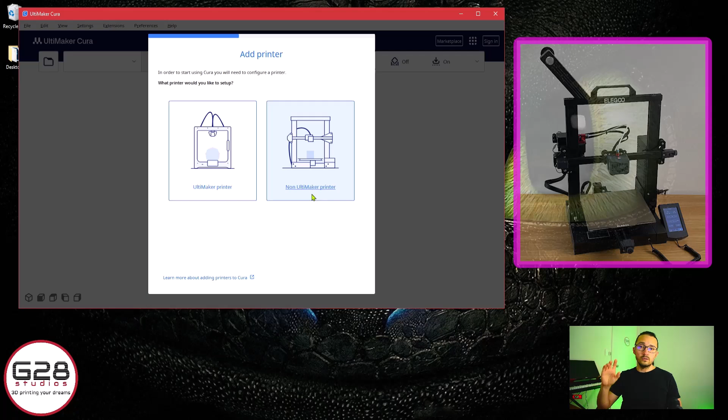In this case, you will see settings only for the Neptune, for Bowden tube printers, okay? So I'm going to select non-Ultimaker printers and hit add a non-network printer. I'm just going to search for Elegoo and Elegoo Neptune 3. Elegoo has Neptune 3, 3 Max, 3 Plus, and 3 Pro. I've got the standard one, which is 235 millimeters width, plus 280 height max. That's the maximum.

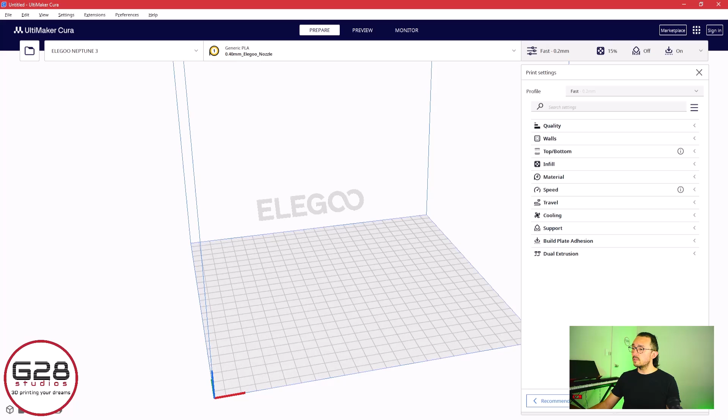What I like to do here, the first thing is change the printer settings options to the advanced options. I don't really remember how to do this because the last time I did was... there you go. So you just click custom and then you have everything. And then here you can click expert, or you can click all. I'm just going to click all.

It doesn't mean you need to use and change all of this stuff. I'll show you just the real pieces you need to change. Quick note, there's going to be a lot of probably tests that will fail because I don't know why that happens, but you have to tweak something else for the tests to work, like Z-hop, which I'll show you in a minute. So you have everything there, you have all the settings there.

Quick note, I'm going to use a completely brand new, unboxed filament. This one is from the brand Techcore. If you Google it, you probably won't find it, but this one is from Inkstation. I'm in Australia, and I have to give a really good shout out to Inkstation because their filaments are great, and their support is great as well.

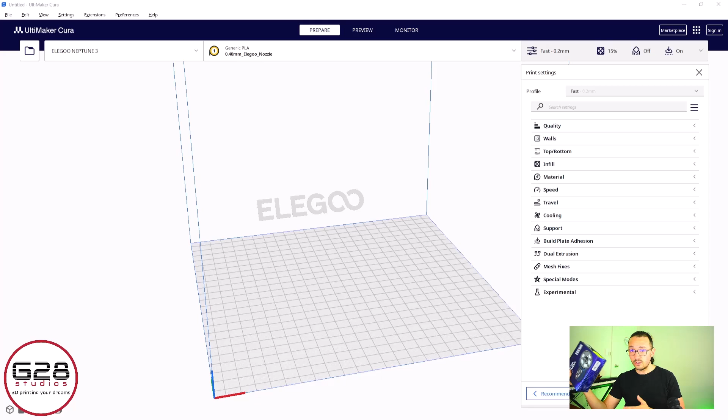I've bought hundreds of them, and I've had a few issues with filaments. When I have issues, I contact them and they either ask me to send the filament back to them with no cost at all, and they give me credit to buy another filament in exchange.

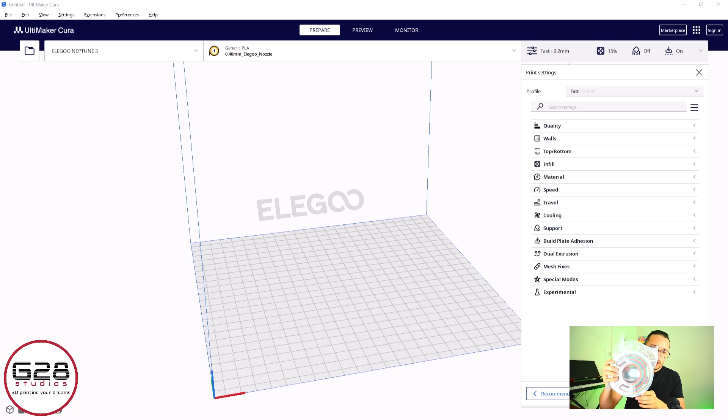So this one is a PLA Rainbow filament. It's a multicolor filament, and it's not silk, so it's not a shiny finish. It's totally enclosed in the bag because I'm going to test this one from scratch for you.

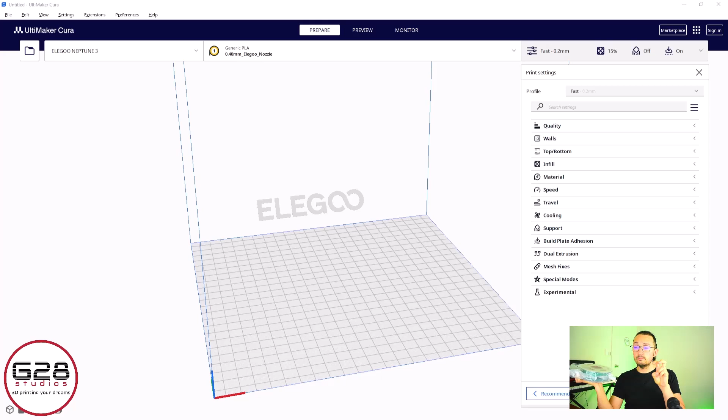If you have a filament that's already been sitting somewhere on a bench, we're going to have some issues with these settings, because this type of material absorbs water, so it gets humid, and that moisture just screws up the filament. So just so you know, we're starting from scratch with a really good, probably dry filament. We'll see - I'm pretty sure it's dry.

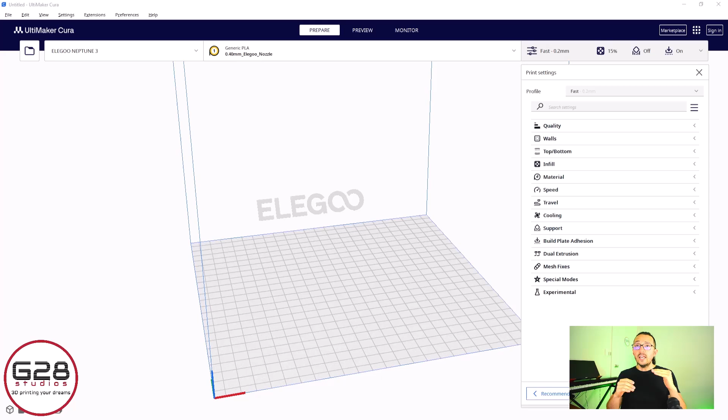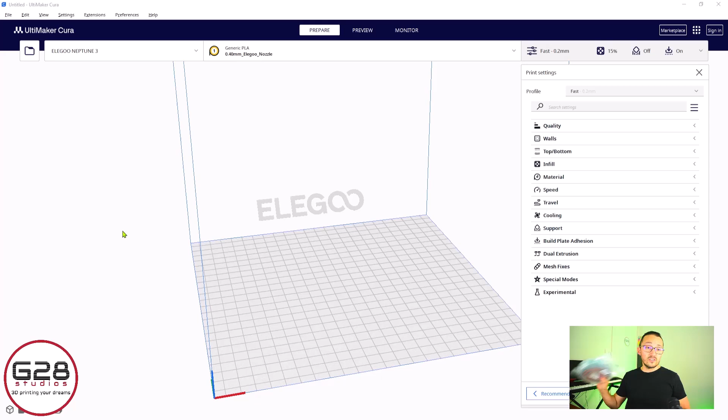So the first thing we're going to talk about is the temperature tower. What the temperature tower is going to do is allow you to find the best temperature for your filament - where it melts, at what temperature it melts, and how fast it dries. I'll show you what I'm talking about on screen. So let's talk about how to create the temperature tower that will allow us to find the best temperature for this filament, specifically for this roll, okay?

In general, I use 200 degrees. Sometimes I go down to 195, and sometimes I go over 200, up to 210. When do I go low, when do I go high? I go higher when it's winter, and I go lower when it's summer.

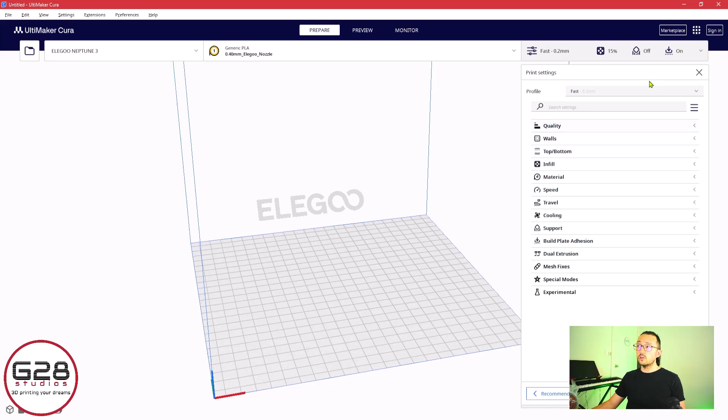Go to the top right corner, click Marketplace, and then you can type calibration - it's going to show that option at the top. Before it was called something like calibration shapes or something like that, but now they have this auto tower generator, so you just install it. Accept - it says install and quit Ultimaker Cura, so you quit it and then reopen it. It has changed - last time I used it was 1.5 years ago.

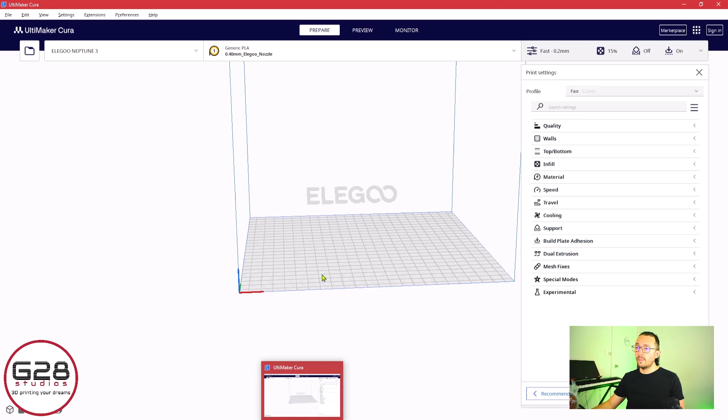Okay, here you go to Extensions and Auto Towers, but under post-processing you'll see something else. And the first thing we're going to work with is the temp tower, so you just click it and it's showing you. Now, I need to tell you, I'm going a little bit blind here because the settings have all changed a lot. I may understand what's going to happen next, but it's changed a little bit, so I'm not going to pretend I know everything. It's better if you see me being natural instead of watching a video that's cut off every 2 seconds, okay? So just follow me and I'll explain.

So the PLA and PLA Plus - they're the same PLA filament, but the PLA Plus has something that makes it better. Both print the same. This one is a normal PLA, and I'm going to show you the difference between the temperature tower for PLA and PLA Plus. So let's add the PLA one.

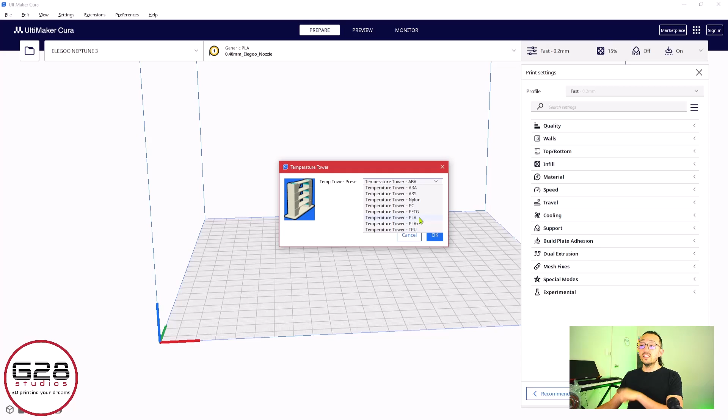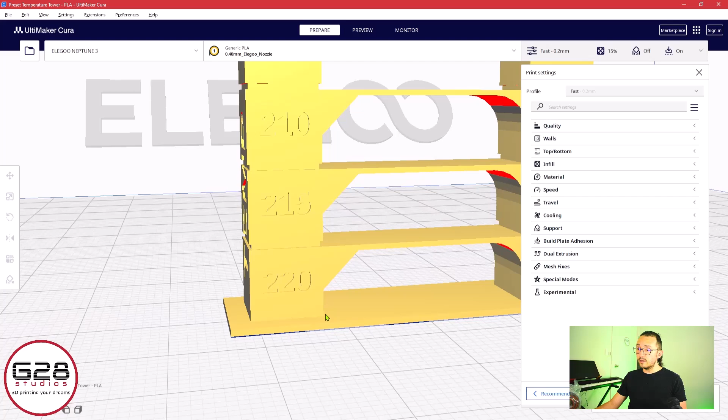Do you see this number at the bottom? It says 220. That means the printer will print this - let's call it a bridge - at 220 degrees, only if we tell it to, and I'll show you how to do it. So it starts at 220, finishes the bridge, and then the next bridge on top of it will print at 215. If you don't know how to use Cura, to pan left to right, up and down, you hold the scroll button.

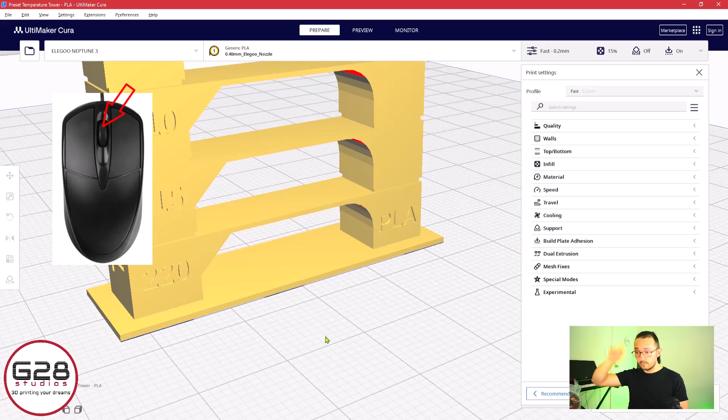So you have the scroll wheel: click it, then click, hold and drag to move everywhere. If you want to zoom in or out, just scroll up or down. If you want to move around, like turn the camera, you right click, hold and move. And left click is normal select.

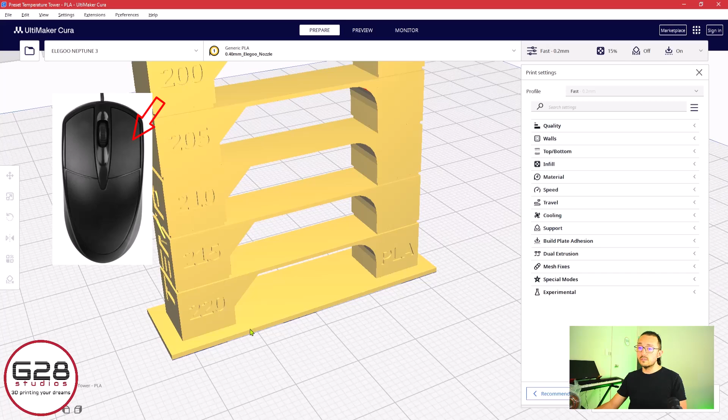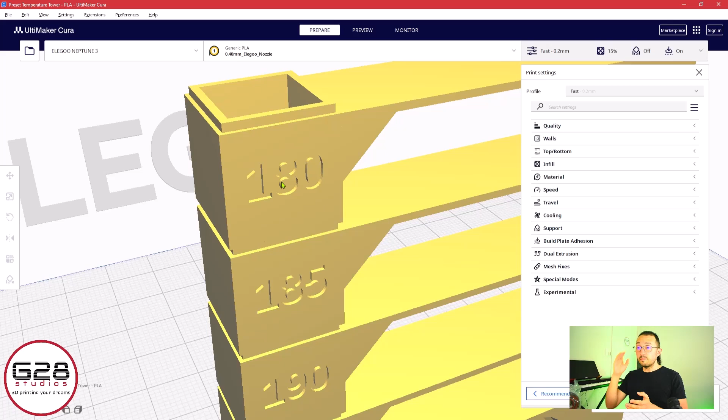Anyways, first bridge 220, second bridge 215, we can go down to 180. Honestly, if I forget the printer is printing, I just leave it to finish. But if I'm looking at the printer and waiting for it to finish, I would stop this at 190, because lower than 190 the filament in the hot end isn't hot enough.

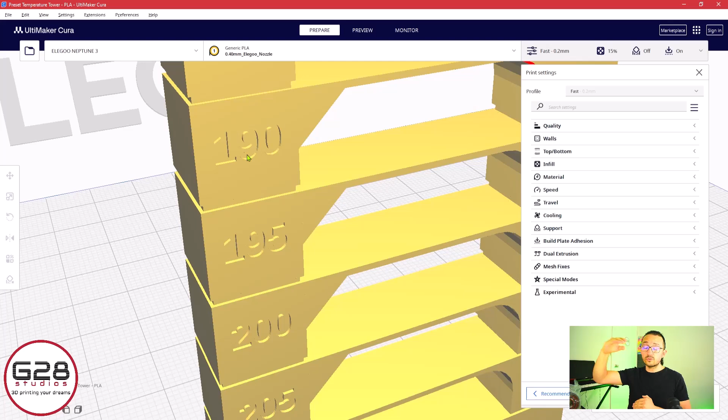So at 190 you will see the range difference between 190 and 220. Now this is the tower for the PLA.

Let's add the PLA plus. So you go to extensions, auto towers, temp tower, and then select PLA plus.

PLA plus, since it behaves differently, goes from 230 up to 200. So what it's telling you is that those are the good temperatures for that type of filament. Same thing, I've used both PLA and PLA plus at 200, between 195 and 205. It really depends on how hot or cold the weather is where you are at the moment. So you'll see that if you print at 200, that's a really sweet spot to be printing.

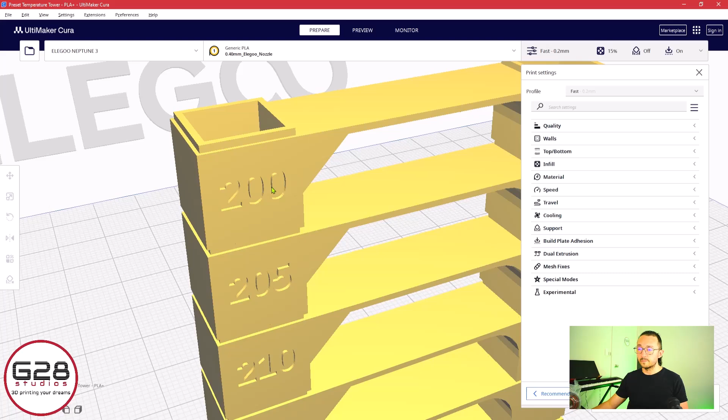I'll change this back to temp tower PLA because that's the one I'm going to use. Oh, this is annoying.

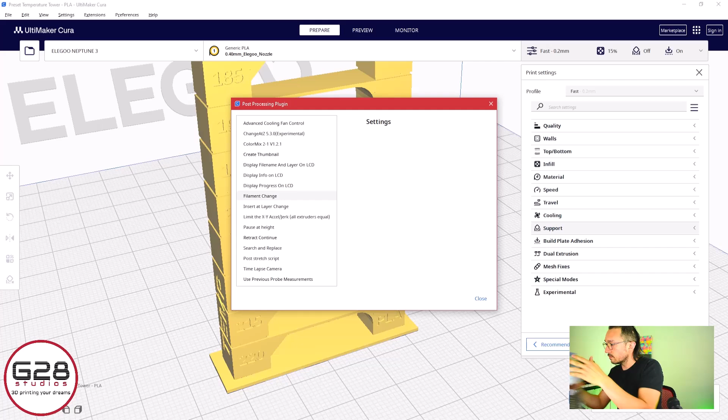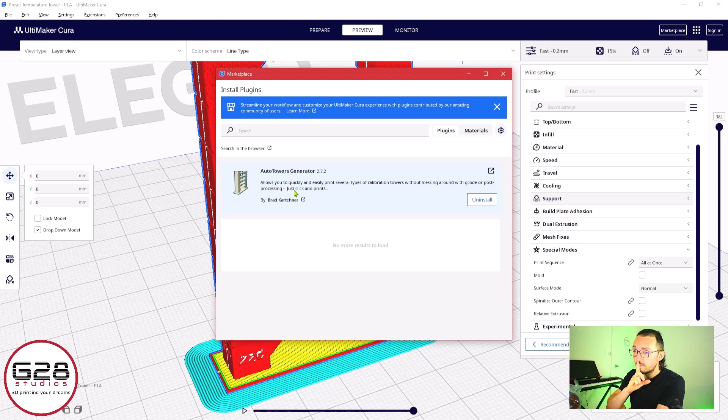So after reading a little more about this, I found this description that says it allows you to quickly and easily print several types of calibration towers without messing around with G-code or post-processing. This means you don't need to change anything else, which is concerning, because before, unless they just made it super smart, you had to set the layer where the tower would start changing the temperature. Before, I'd be changing between 35 and 40 in the number of layers.

So, like, layer number 1 is the blue one you see here. So how did I get to this point?

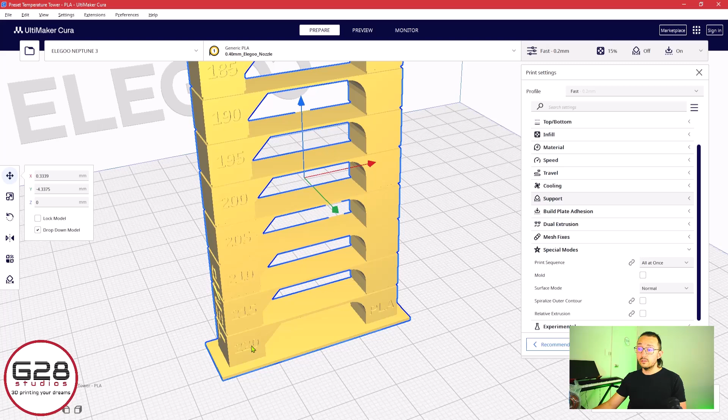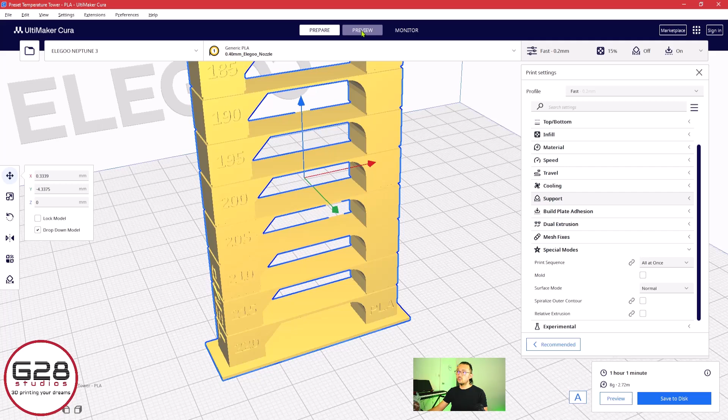Cura has the option to auto slice the model, or you can slice it manually. What happens is that if you move the model and leave it, you see here on the bottom... just gonna move my head away from there. You see here it says slice. So you click slice, then you can go to the preview option on the top bar, and then you will see these things.

So if you go to the bottom, that's the first layer. First 1, 2, 3, anyways. So if you go up, I would tell the printer to change the temperature from 220 to 215, so reduce 5 degrees, at layer 43.

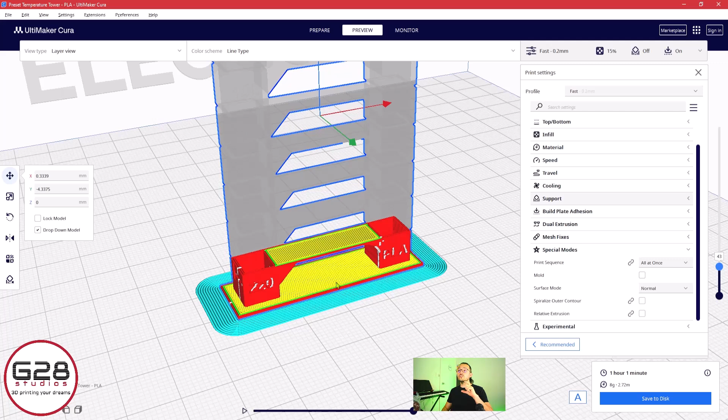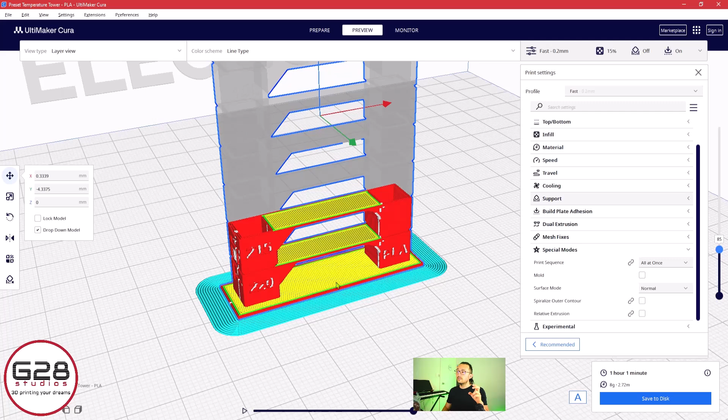But I want to check the second bridge. If the first bridge is at 43, the second bridge would be at 86. So if I go to 86, it's accurate. Now I'm just going to go one bridge more, so 86 plus 43 is 129. So if I go to 129...

What I'm looking for is the first layer after the bridge. So the first layer after the bridge changes, in this case, at 128, but 43 plus 43 plus 43 is 129. So that's where I would tweak a little bit.

But anyways, apparently this is doing all the post-processing for me. So I don't need to tell this model to change from 220 to 215 at layer 43 and check everything that I just showed you.

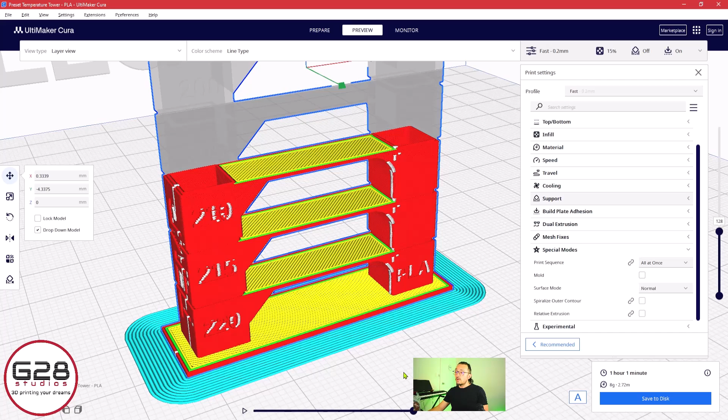What is going to happen is at some point, either at the highest or lowest temperatures, you will see filament hanging around, like a lot of stringing, or probably broken bridges, a lot of things. But what this temperature test will show you is what is the good temperature for this filament to create the bridges.

Okay, so I'm going to save this on my micro SD card, and I will send it to print, and I'll show you how it comes out.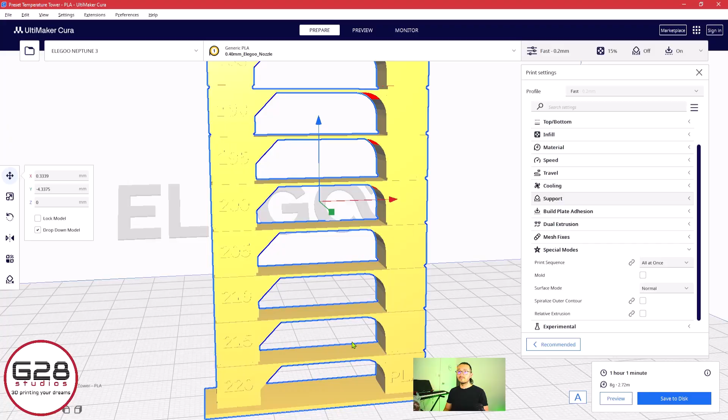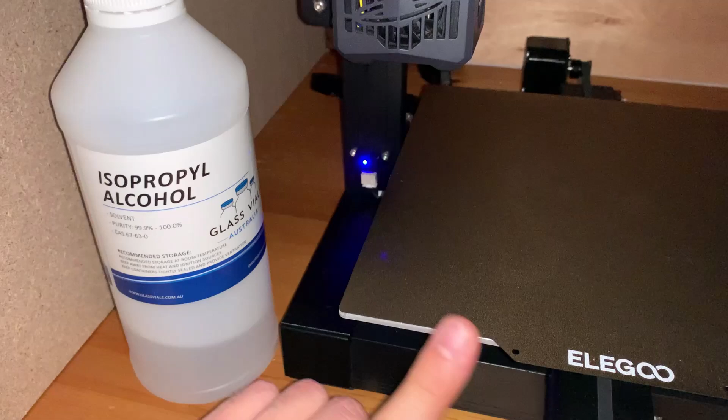So I'm here on my printer. The first recommendation I would do is clean the bed of the printer, of course with isopropyl alcohol, just to clean any grease or dust that will create issues for any printing sticking to the bed. So I'll clean the bed first.

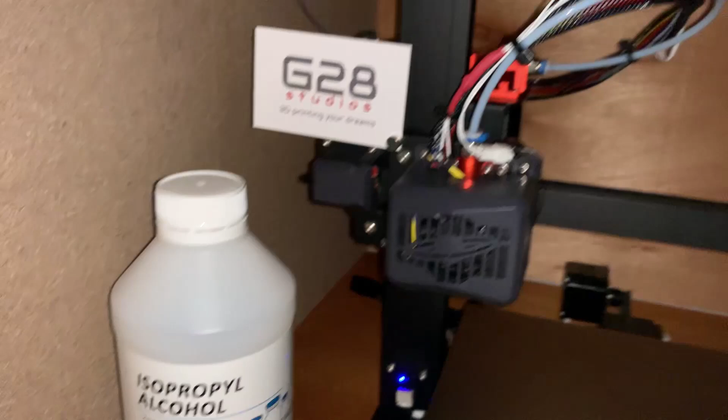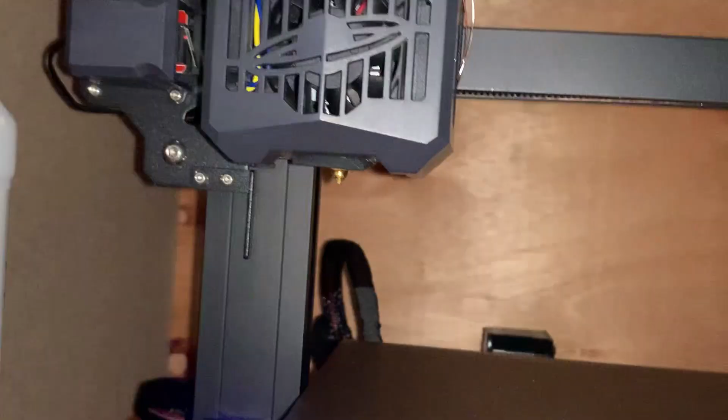The second thing I really love to do is, with my tweezers—the ones that come with it, not the tweezers, how do you call these, the flush cutters—I really like to clean the nozzle here.

Just really gently, I clean the excess filament that comes out before every single print, because if you leave filament hanging here and it's dry, that will cause the leveling of the printer to fail. So don't forget that.

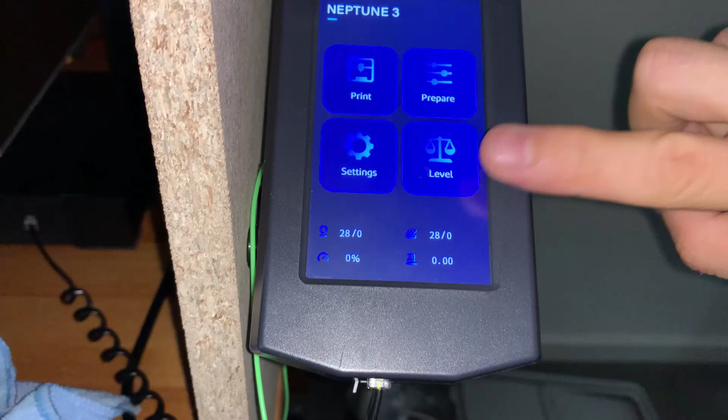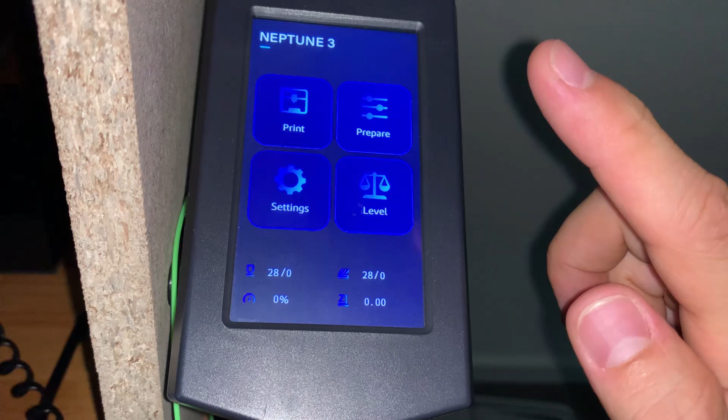I already have my micro SD card in the printer, and what I'm going to do is start the leveling first, sorry for the mess down there, and then after the leveling I'll print the model, and I'll show you in a minute how that goes.

I'm printing something else here. I have a huge mess here, but this is my printing studio. I will clean it someday, soon. Three weeks later.

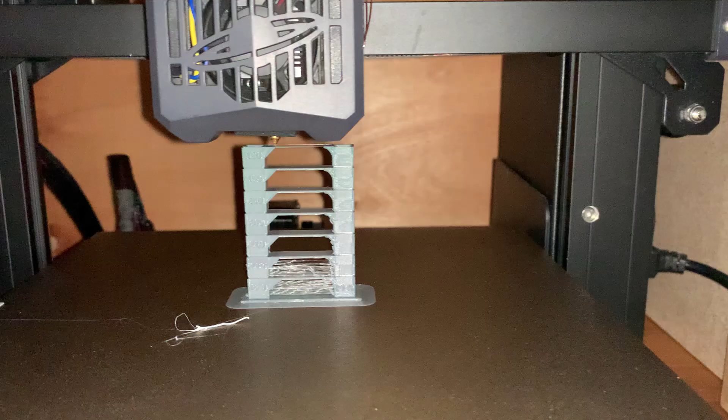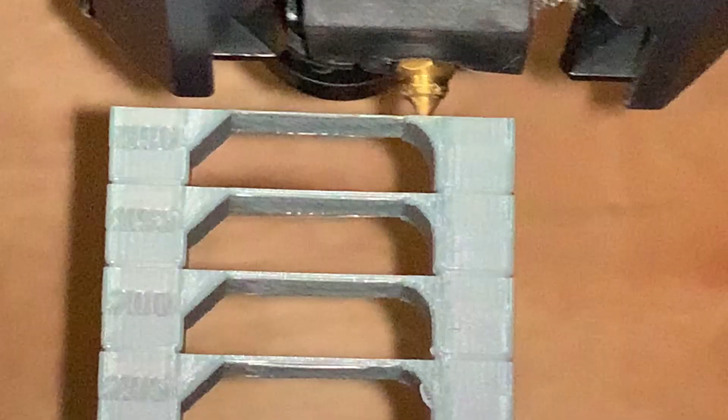Just showing you what is printing, and that is the bridge. So what it's doing is printing filament in the air, and it's drying it. My phone doesn't have a very good resolution, but it doesn't matter, I think you saw it.

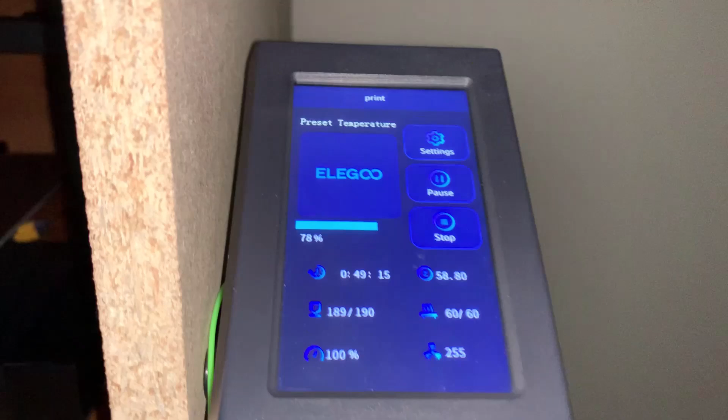Right now it's printing at 190 degrees, you can see it here. I'm just going to stop it and I'll swing back to the computer and we'll talk about that tower. So back at the computer, I've got this printed, and as I said, I printed this one up to 190 degrees.

I'll show you what are the key points, what are the determining factors to choose the correct temperature for this, only for that filament, which is kind of a generic rule, okay? You'll see.

Just going to get this pen. As you can see, just going to switch the light on here. Cool. So as you can see, well, this is 220 degrees.

Of course, 220 degrees is too hot, okay? So you don't want to go with 220. You don't want to go with 215 because still this means it's too hot. It's really, really hot and it's overheating the filament, okay. Now, what about 210?

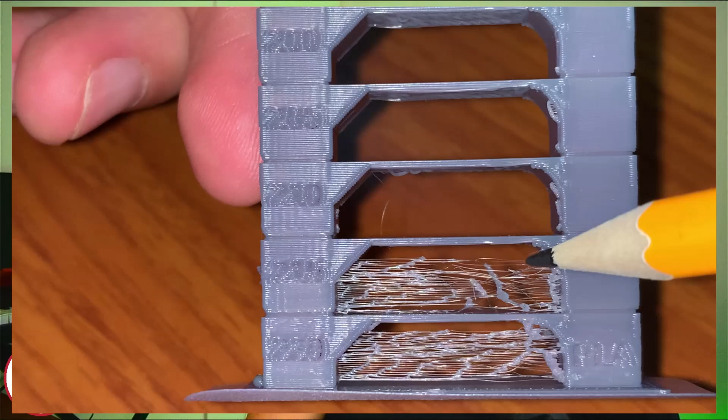210 degrees is a good spot to begin with, but things that will tell you this is still too hot for the filament. Do you see these blobs? Where is it? Here, these ones? This means it's too hot still.

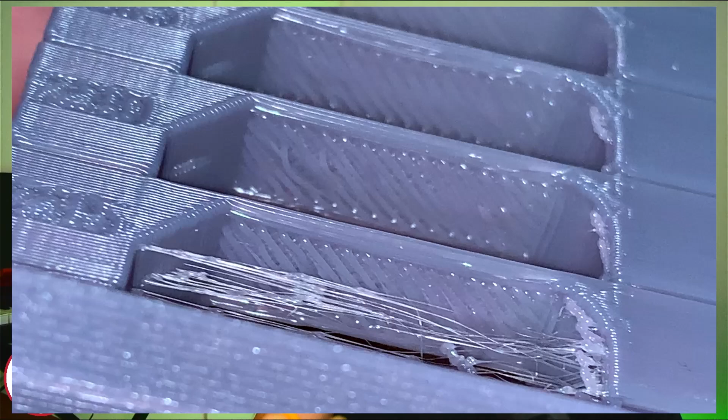Now, if we see under the bridge, these bits of filament that are hanging, that means it's too hot and the fans are not cooling fast enough the filament being printed in the air. Okay, so 210, we're getting closer. Plus you have here in the middle these artifacts that won't really look good on your printings.

205, this one still has the same issue of those artifacts, those little pieces of plastic, less than 210, okay? They're not too visible. And the bridge, if you compare this part with this part, this one looks a lot better, but still it's not in the best spot.

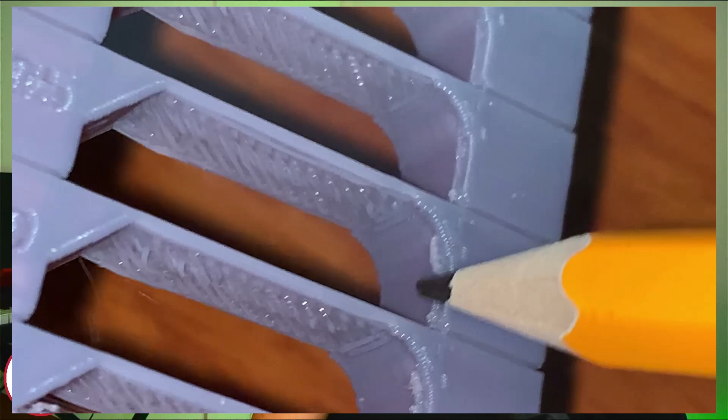Now, let's talk about 200 degrees. These artifacts are pretty much gone, okay? 210, 205, 200 — the bridge still has those little lines, which I think you can live with. I would live with those ones. 200 for me is the best, the sweet spot for most filaments.

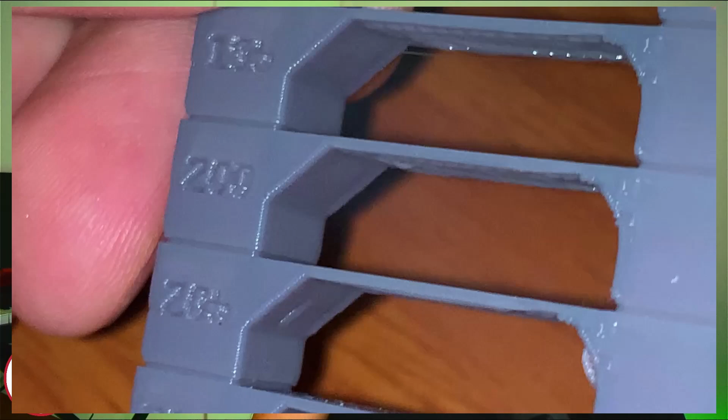But for this new roll of filament, the best temperature is 195. As you can see, there are no artifacts here as there were at 205, 200, 210 and higher. And I wouldn't go to 190 because that's too low, really, that's going the other way. So you don't need to be too hot or too cold, okay? For this one, I would go with 195.

Now let's talk about the second step that I've got in my list.

So as you saw, the stringing is caused, as I said, first because of a temperature issue or a retraction issue. You have to keep in mind you have to make a retraction every time the hot end travels from one side to another side of the model.

Say, for example, you're printing two objects at the same time and there is a space in between, and you have to move the hot end from one object because it printed the layer, then it needs to go to the other side to print the other layer. During that moment, you need to pull out a certain number of millimeters of filament, called retraction. You have to retract the filament and then travel to the other side.

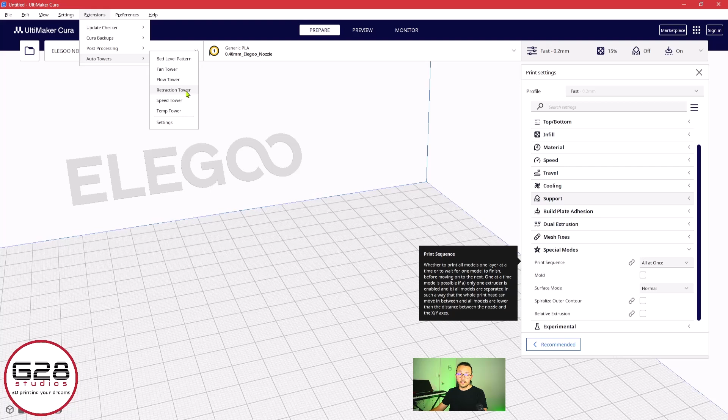So, retraction tower. This is going to be interesting because, as I said, this is the first time I see this.

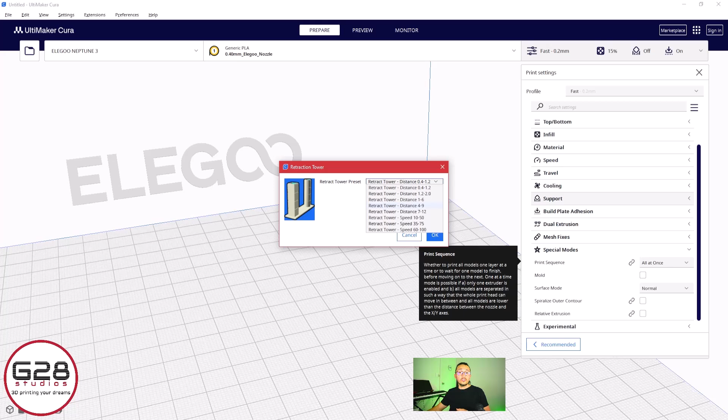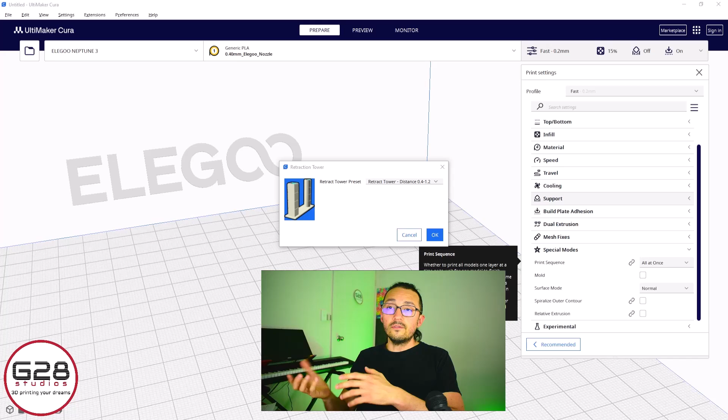When it's Bowden printers, you have to play between 1 and up to 7 millimeters. If you go over 7 millimeters, you're going to have issues with the filament coming out. If you pull out too much, the filament will get cold, and when it's pushed back into the nozzle, it's too cold and won't heat up fast enough, causing under extrusion issues. So if it's Bowden, you have to go between 1 and up to 7 millimeters of retraction.

When it's direct drive, you go up to 1 millimeter because it's great. I honestly really like direct drive printers, but all my 3 printers, which I bought 3 years ago, are Neptune 3, the standard printer. So in this case, as I said, I'll go up to 6. I wouldn't go with 4 to 9 millimeters. These numbers are millimeters, so 0.4 to 1.2 millimeters if you are on a direct drive printer.

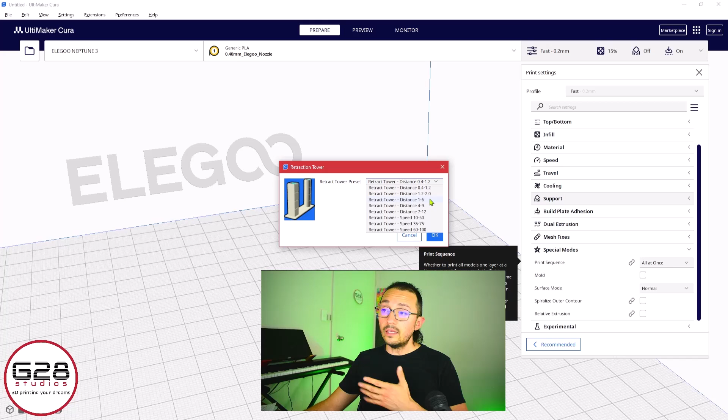In my case, I'll test the 1 to 6. You just select that and click OK. The rest of the options, I think, are not required, honestly.

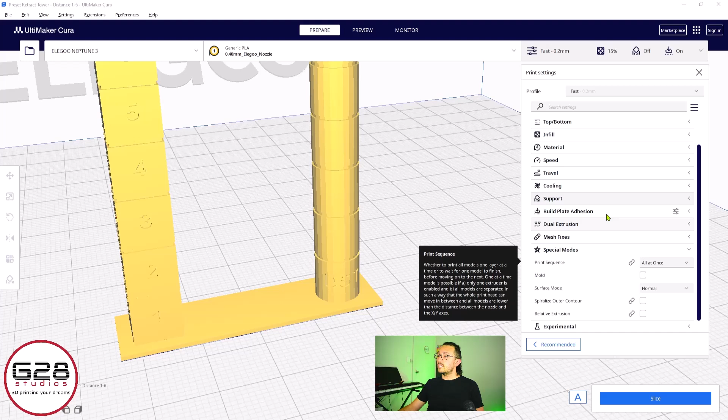So what is going to happen is you need to set up a few things here. I'm just going to bring this one back down. First thing is it's going to print. You see the numbers here on the bottom, 1, 2, 3, 4 on each square.

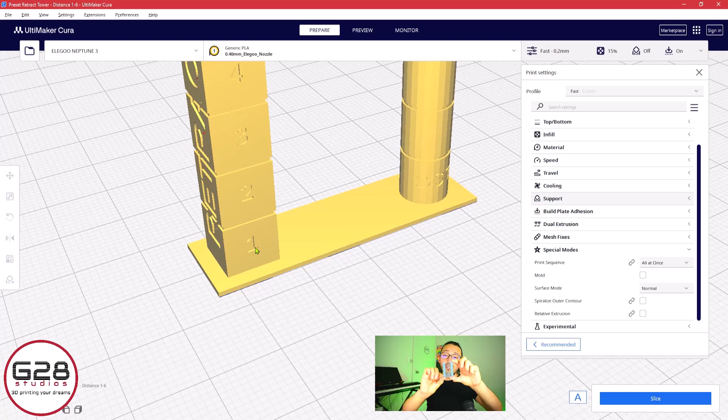This means that every time the extruder needs to travel from one side of the printing to the other side, it's going to retract a certain amount. 1 millimeter only on that square, on that area. The second one is 2 millimeters, then 3 millimeters, then up to 6. It'll show you pretty much the same pattern we have here, like a lot of stringing, less stringing, and there's going to be a sweet spot where you will not see any stringing.

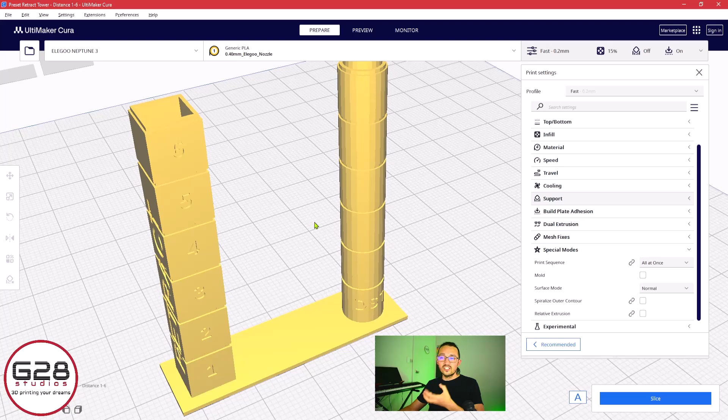Now, you might have the problem of having all 6 levels with stringing, but number 6 is pretty clean, though you still see some strings coming out of it. What I'd recommend is you print the 1 to 6, and if it still shows stringing, go to the next level. You add another retraction tower, but the next one, which is 4 to 9 millimeters, so it's going to show you 4, 5, 6 again, but it's going to show you 7, 8, and 9 millimeters of retraction.

If you see 7 millimeters retraction is good, make a little tweak. Go down to 190 degrees and test again the 1 to 6. So we're going to go step by step. Select the 1 to 6 millimeters.

Now we already said that 195 degrees is the sweet spot of temperature for this filament. Where do you set up the temperature for this one? You go here on material, and here, printing temperature. Printing temperature is 195. That's the general printing temperature.

The initial layer, which is the second option, printing temperature initial layer, 195 degrees. It's a little bit redundant, honestly, but I don't know why they have all these options. Just follow me: initial printing temperature, 195. Final printing temperature, 195. If you set like 205 then 195, it's going to...

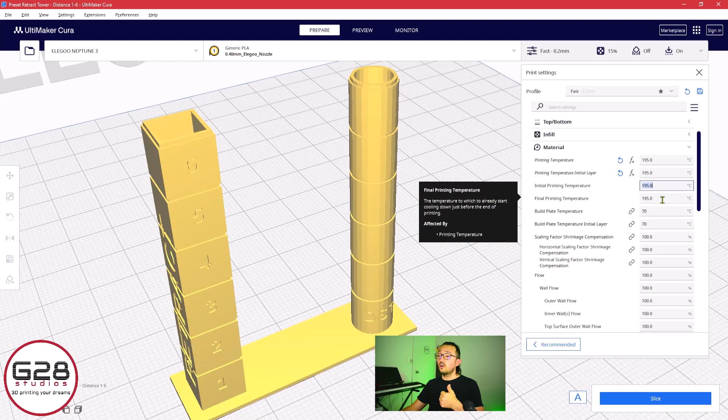...reduce step by step during the whole printing, going to reduce the temperature from 205 to 195. So make sure all four are 195. That's the first step: set the temperature to the temperature that you found here.

Second step, and this is something I didn't tell you, but you also need to have good bed adhesion. Okay, so 70 degrees is way too high. If you go with 60 degrees, it won't fail. If the printing, whatever you're printing, comes off the bed, there could be a lot of reasons, but always set it up to 60. 70, as I said, is too much, honestly.

So that's the second thing you have to set up. The third thing you'd set up here, just to make sure the printing goes okay, I would say travel. So let me check the speed. Speed is okay, printing speed of 60 millimeters per second is like the normal speed. You can go higher or lower, but in this case we're just fine-tuning the filament.

Go to travel, and here you will see enable retraction. I am enabling the retraction of the filament, which is already on the G-code. The G-code is all the lines that will be used on this model to print. It'll say retract at layer change. This is something you need to set up if you don't want to screw up your printings.

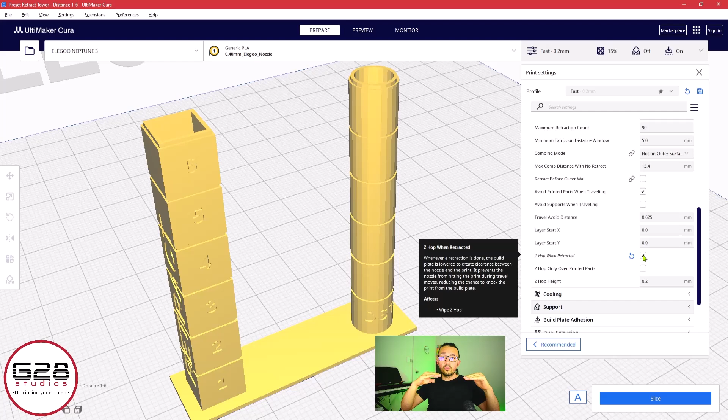But the thing that I want to activate is Z-hop when retracted. Why? Because let's talk about layer 45. If you are traveling from this part of the model on layer 45 to this part on layer 45...

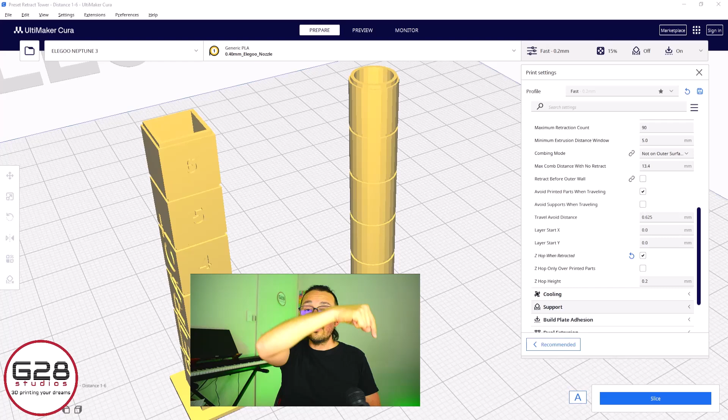What I would do, and I really recommend you set up the Z-hop every single time, is this: the nozzle will print layer 45 on one side, then it will retract the filament, go up a few millimeters, travel to the other part of the printing, and then go back down. That will allow the printer to avoid hitting the other parts of the print.

I've had so many issues with the Z-hop not being activated during hours-long printing. When the model is too high, it becomes wobbly, so when it travels, it hits the model and kicks it off the bed.

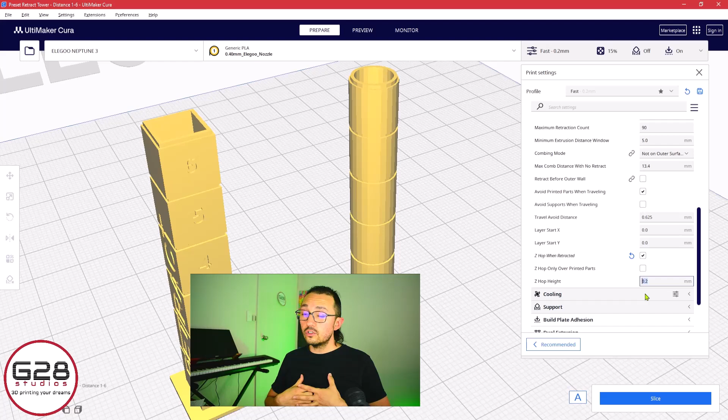So you activate Z-hop when retracted, and then you select the Z-hop height. You can go as many millimeters as you want. How many millimeters would I go with? 2. Two millimeters is enough distance for the printer to avoid collisions while traveling to the other part of the printing. 2 millimeters is perfect.

I even use 0.5 on my Cura slicer. That's more than enough. You can start with 2, then probably go down to 1, find that 1 is okay, and then go down to 0.5 and find that 0.5 is perfect.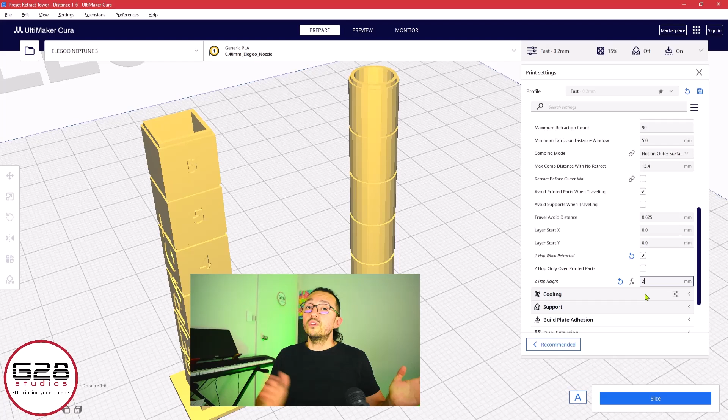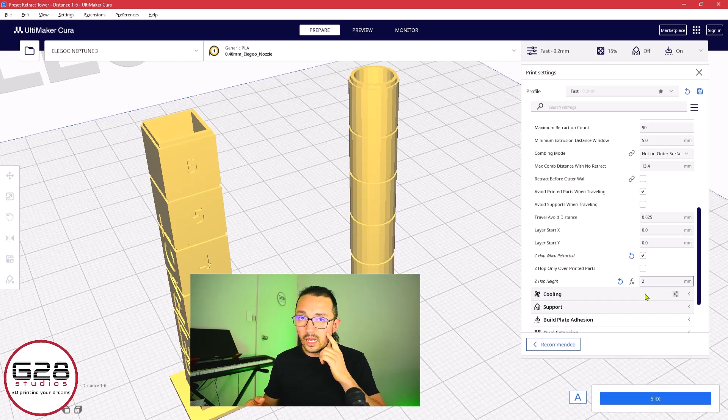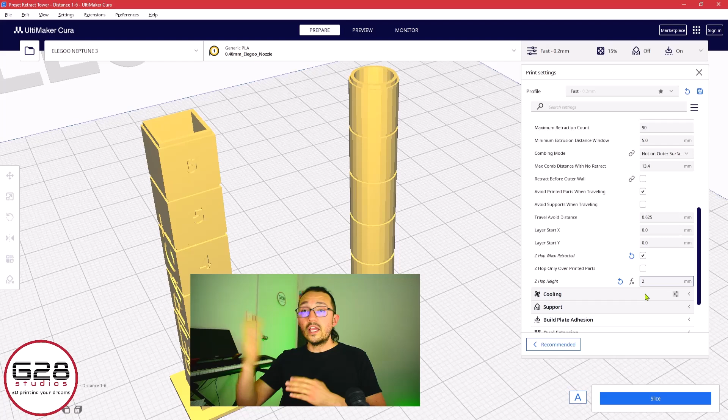The other benefit of reducing the Z-hop height is time. Every time the nozzle goes up, travels, and goes down, it consumes time -- probably 1, 2, 3 minutes over a 6 hour printing. But think about the printer's parts: going up and down repeatedly wears on the Z rod behind the printer, so you really have to take care of those rods. The less distance you make the printer raise up and down, the better. So 2 millimeters is good enough.

I would say, for this option, no, don't activate this one, because I think I've had problems with this one activated. Just leave it like that. There's nothing else to check here.

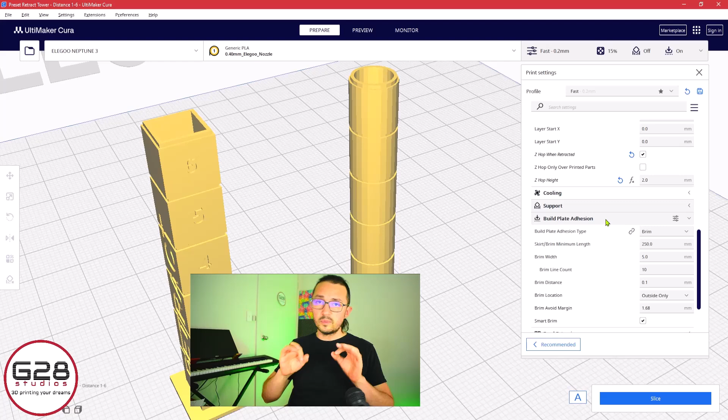It's here. So I'll show you what happened, because as I said, you might get surprised with the results of this test, and this will tell you a bit more. So here it is. Where is it? Here.

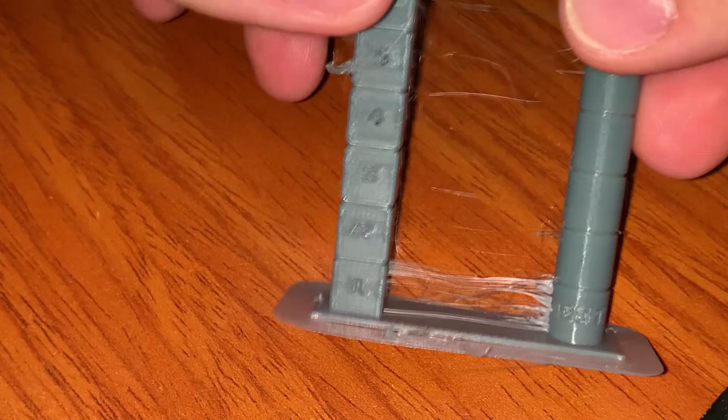As I said, you might have the bottom retraction -- let's say floor, 1 millimeter. It's not enough. 2 millimeters is a little bit better. 3, 4, 5, and 6. As you can see, there is stringing at every single layer. So what this is telling me is that it doesn't matter if you go with 2, 6, or higher -- I wouldn't go any higher than 6, honestly -- but it's telling you that going with 2, 3, or 6 will not make any difference.

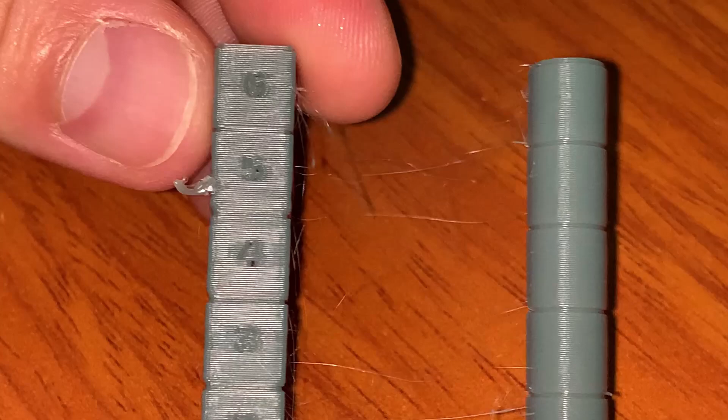However, I found that when printing PLA, honestly the best retraction setting is either 5 or 6. Higher is just too much. You can give it a go, in this case with 4 for example, and make a small test. Don't print a huge full bed print model, just go with something small where you can test the retraction settings and the temperature tower settings. Just try number 4, 5, or 6. Basically, you just need to keep in mind both things, the temperature tower and the retraction tower, so that you can find the best settings for your printing.

In this case, for this filament, if I go with 195 degrees in temperature and a retraction of, say, 4, I would be in a really good place. There is still a little bit of stringing, it has to happen. However, there is one additional option that I was going to mention, and it is wipe options.

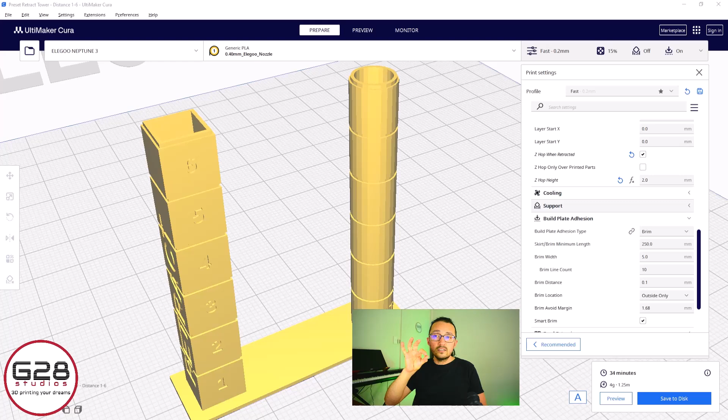What that wiping thing means is that when it's printing and it's going to jump from one side to the other side of the model, it will retract the filament and then print on the same area, the same pattern, just to wipe out the rest of the filament that is hanging from the nozzle.

I'm not sure, honestly, on Cura if you can see that option. From Cura, on the top right corner you have a search bar. You can click that and type wipe, for example. And it's showing you: whether to include nozzle wipe G-code between layers, maximum 1 per layer, enabling this setting. Well, this is not the one. Probably the distance of a travel move inserted after the outer wall to hide the Z seam better. You have to give it a go if you're going to use Cura. But let me open...

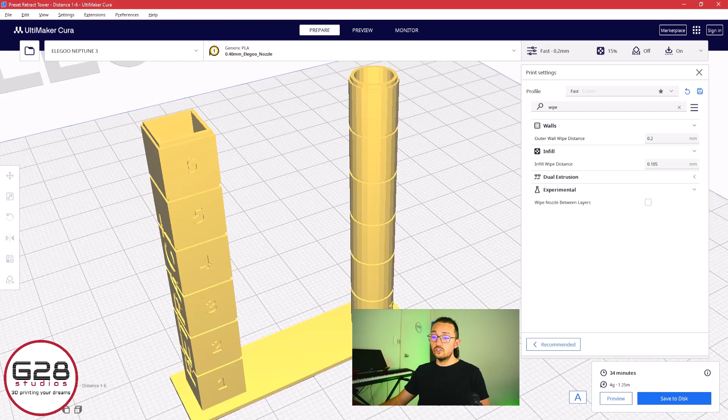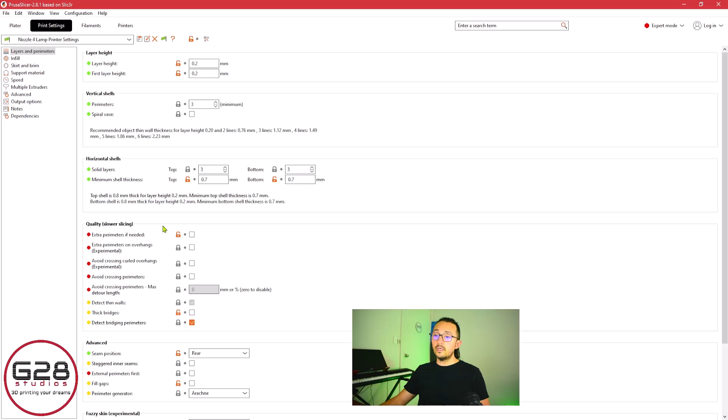Prusa, where is it? I have a problem with Prusa Slicer 2.9, so I'm going to open version 2.8.1. Here, I'm just going to type wipe while retracting. I think it's this one. No, the other one. This one.

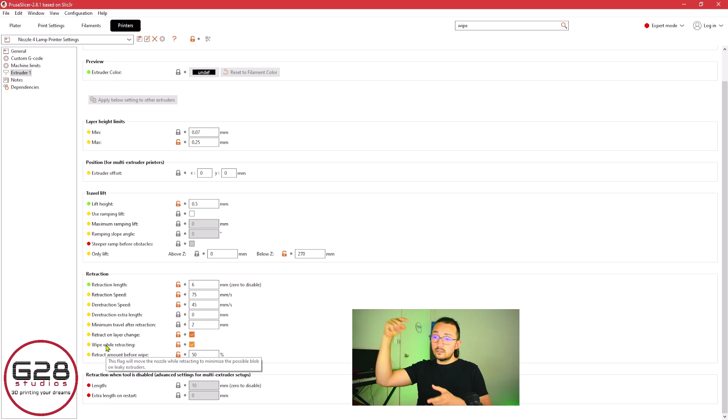So in Prusa, it allows you to wipe while retracting. And again, what it does is it retracts 4, 5, 6 millimeters. In my settings, I have 6 millimeters of retraction length, the retraction speed is 75 millimeters per second, and the deretraction speed, which just pushes the filament back in, is 45 millimeters. The minimal travel for retraction is like if the nozzle doesn't travel more than 2 millimeters, don't retract. It's not needed from what the system says; I haven't touched that one, that's by default.

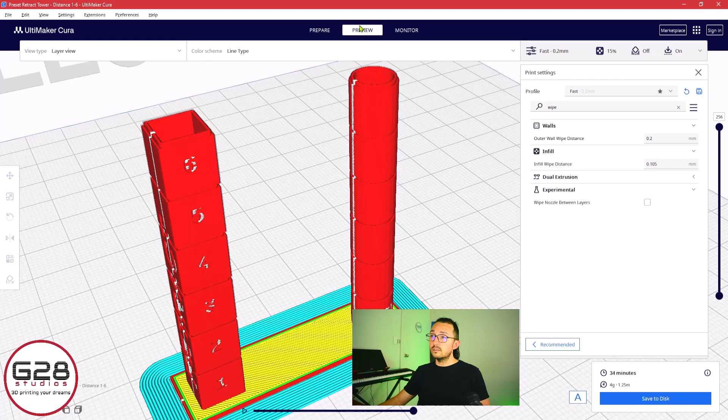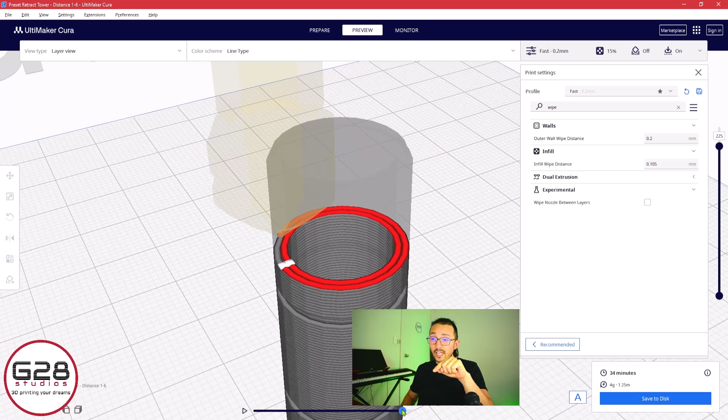But it says wipe while retracting, so it retracts and wipes, and I'm going to show you what that wipe means. So you see here the movement of the nozzle, okay? The red is what is being printed. So it goes around, and when it hits the end, it moves on the same pattern once, probably half of the circle in this case, but during this movement it retracts the filament and wipes, which is cleaning the rest of the filament coming out of the nozzle because it's hot, and then it does whatever it has to do. So it goes up 0.5 millimeters, travels 10 millimeters, and keeps printing.

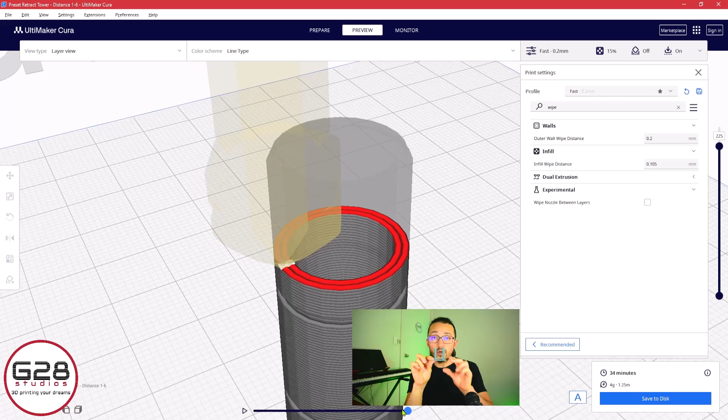I think that's it. I hope that if you got down to this point of the video, I resolved a few questions that you may have about 3D printing and why you are having that stringing, and probably this will help you find more options and solutions that you didn't have for other models where you've had issues before.